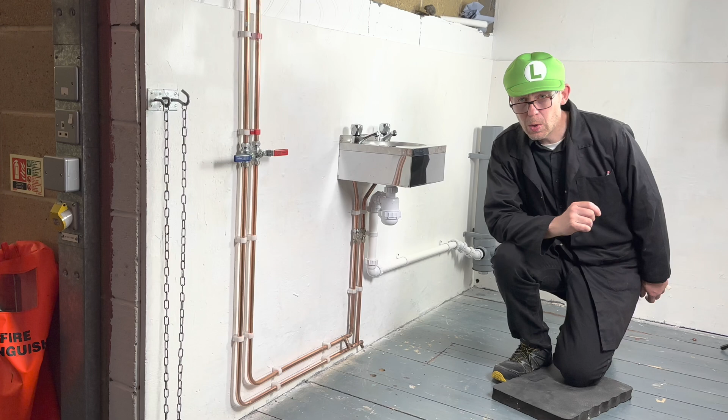Today we are going to install a wash hand basin using copper pipe and waste pipe. We will be following a diagram. Let's do it.

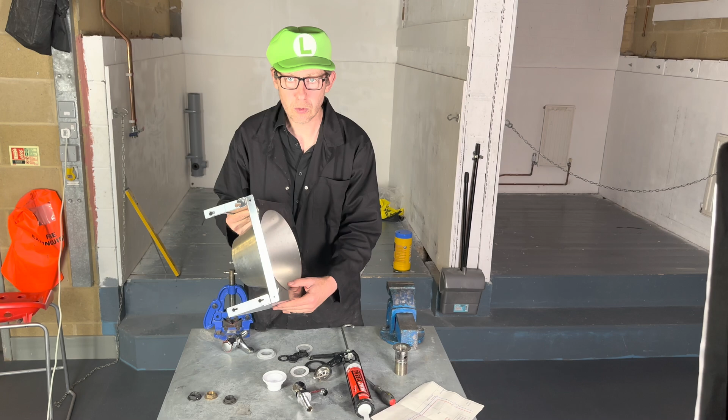The first job we do is we dress the basin. This means putting the taps on and putting on the chrome waste. It is easier to do this before the basin is installed on the wall. In England, the hot goes on the left, the cold goes on the right. Using silicone sealant.

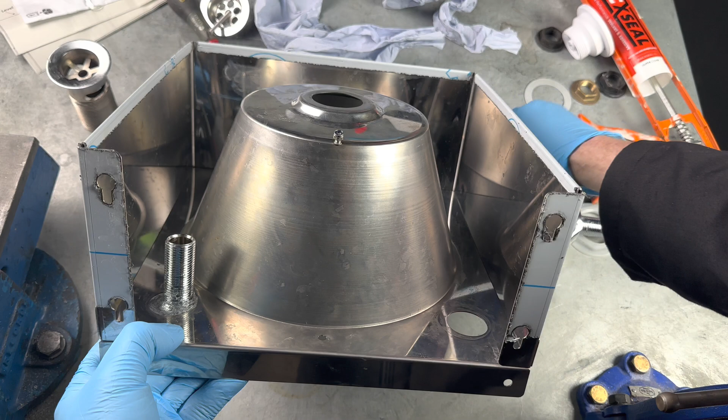And then underneath the basin, we'll put the washer on and the back nut. Okay, at this stage, just do it hand tight. And we then do the same with the cold tap.

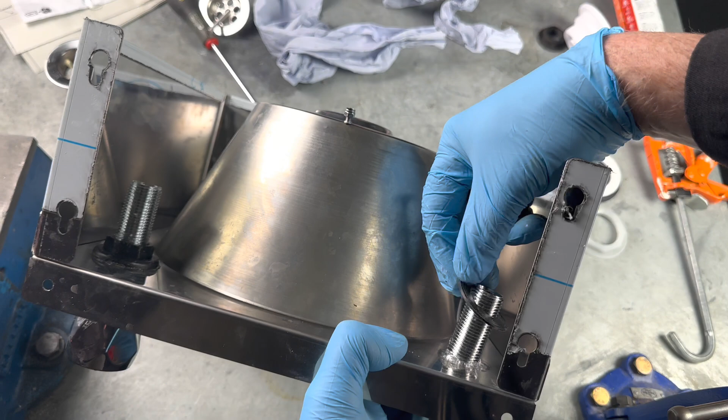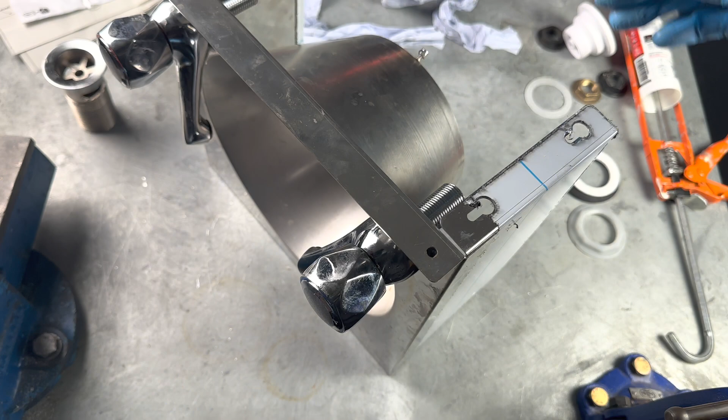So what we're going to do now, we're going to use a basin wrench. And what we're going to do, we're now going to tighten up the taps. So that goes there. Hold the tap from underneath to stop it turning.

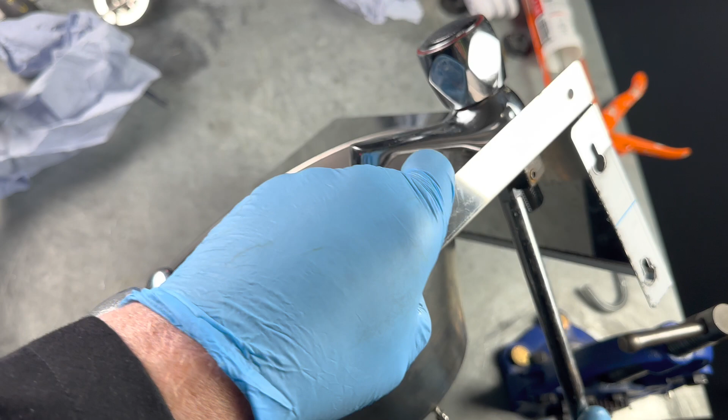And we then do the same with the cold taps. And we turn it. And we turn it. You need to hold it, because otherwise, if you didn't, that happens.

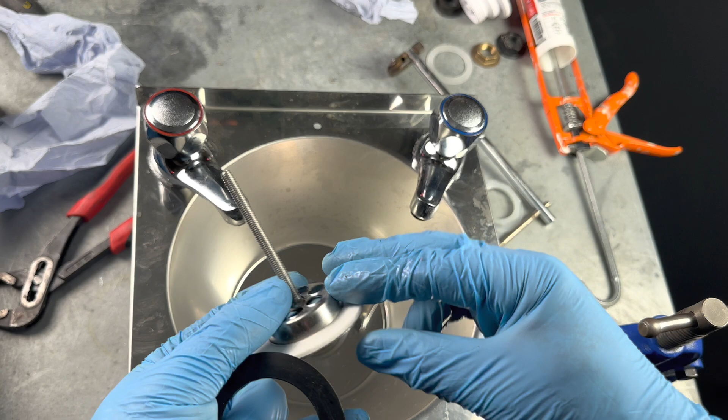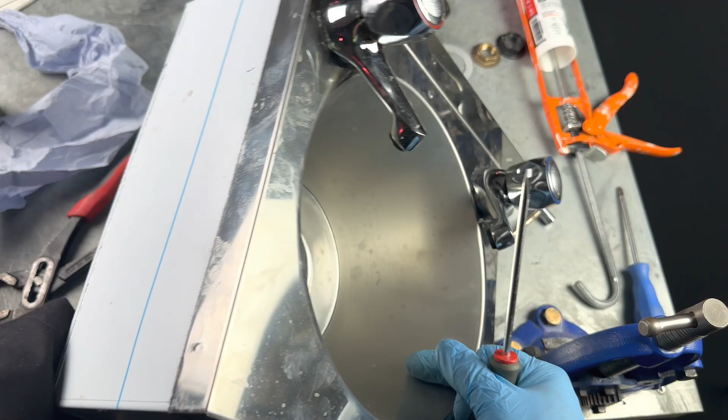So what we do is that goes through the hole, then we've got the black washer goes in there, and this time we just need a screwdriver to do it up tight. Right, the next job now is we need to remove any excess sealant.

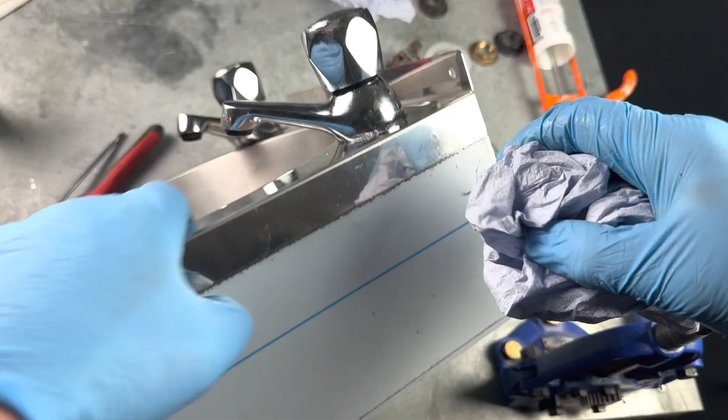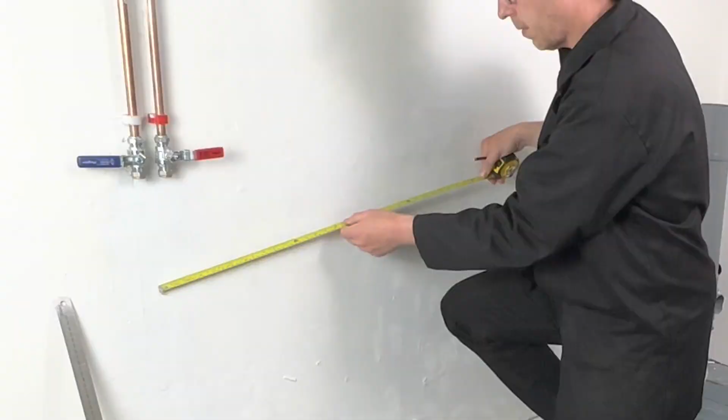Right, so what we need to do now is we need to mark out where the basin is going to go. So it needs to be 700 mm from the centre of the cold pipe to the centre of the basin. So that'll be our first measurement. Let's do it. Eyeball where the centre of the pipe is, and then using a spirit level, draw a level line downwards so we can then measure. We measure across 700 mm.

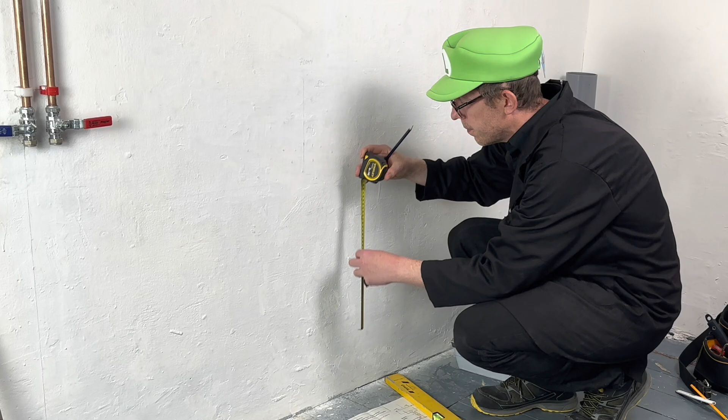Okay. Right, the next thing we need to do is mark out the height of the basin. So our diagram says it needs to be between 800 and 850 millimetres. Let's go for 850 millimetres. So let's draw a line 850 millimetres upwards. You draw a nice level line across. Okay, so it means the spillover level of the basin is going to sit here.

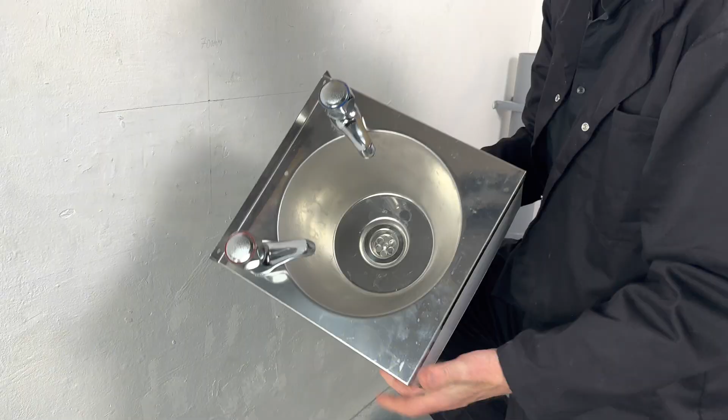We now need to find the centre of the basin. We can draw a line there. That's the middle of our basin there. We're going to line the centre of the basin mark to this line here. We're going to make sure that this ledge is touching this line here, which it is. Once we're happy that that's in line, the centre, we then mark the 2 holes on the top of the basin.

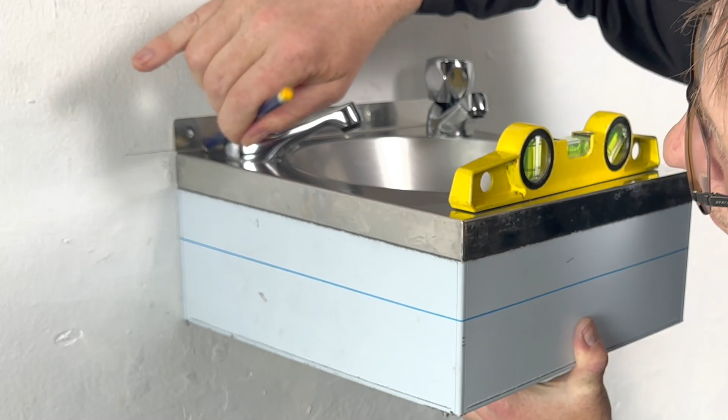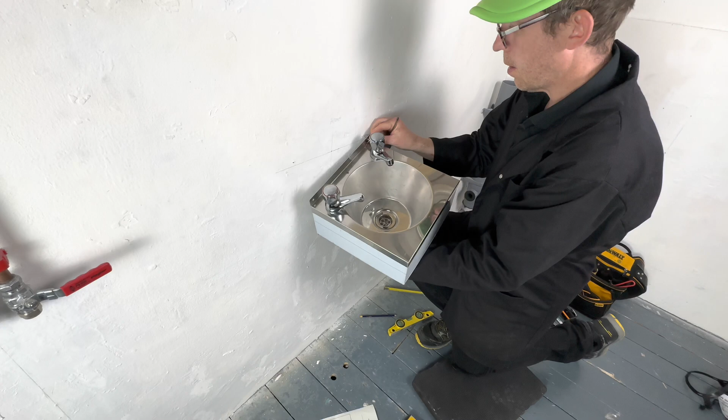What we're going to do, using the bradawl, what we can do now, using some screws and a penny washer. Double check with a level.

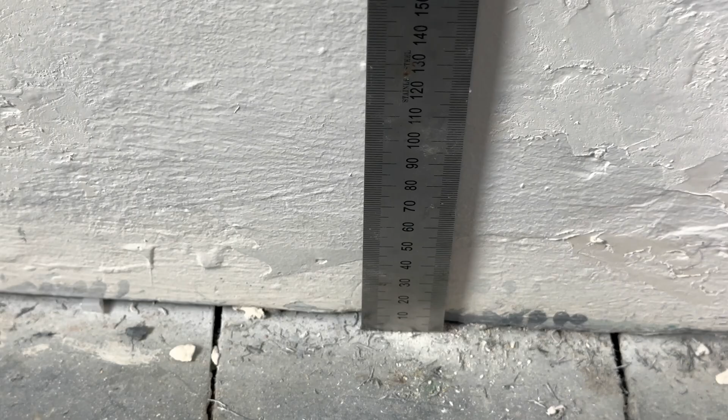The next thing to do is to install the clips for the copper pipework. It's important to get the clips right if you want your copper pipework to look good. Okay, so we're going to measure up 50mm from the floor, which is there, to 50mm, and then I'm going to measure up 50mm again, which is 100mm, and do a mark here.

And you then draw a line all the way across the bottom, and you then, on the second line, get the level, make sure it's level, a nice level line across. Okay, so we've drawn a level line, 50mm line there and a 100mm line there. But we've done this line already from before.

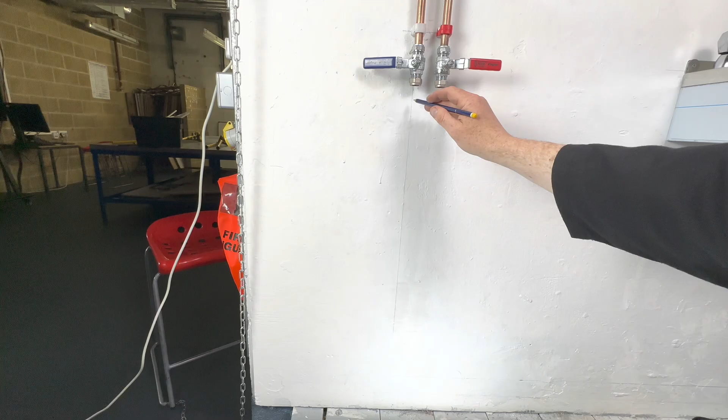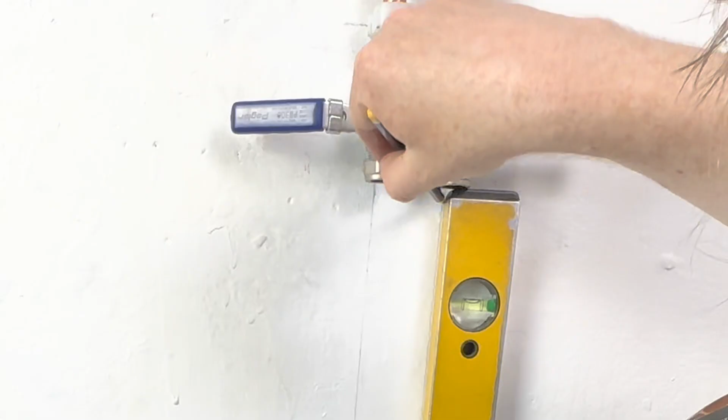We find the centre of the hot pipe, we do a little dash there. Like so. We've done a 50mm line to the bottom, a 50mm line to the bottom, measured up 50mm, and then 50mm again. And as you can sort of see the pipes where the clips are going to go.

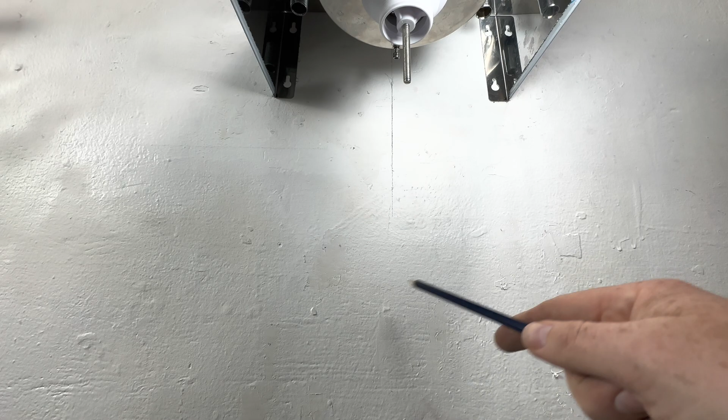Right, do you remember the centre of the basin mark we drew earlier, which is there? Because we know that the clips have got to be 50mm apart, what we're going to do is we're going to measure across 25mm and 25mm from the centre mark. So we're going to measure 25mm and 25mm that way and do 2 lines.

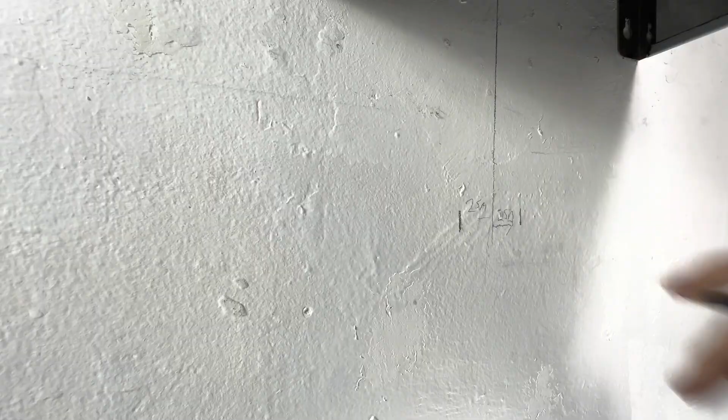Right, so let's just recap on what we've done so far. So we've marked it out. From the centre of the pipes, we've done 2 level lines downwards using the spirit level. And then from the finished floor level, we've measured up 50mm and done a level line across. And we've measured up 100mm and done a level line across.

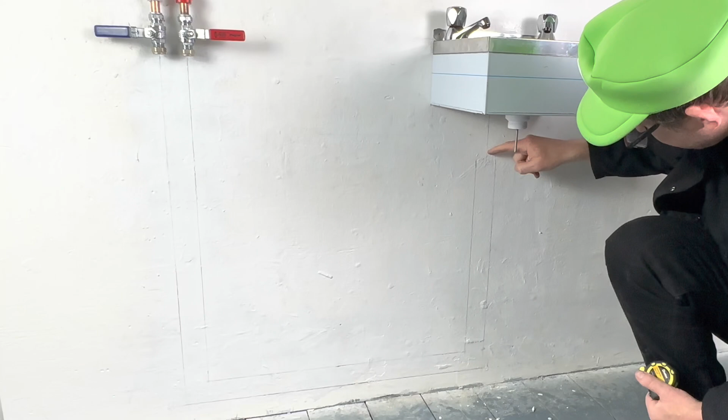And then from the centre of the basin mark, we've measured 25mm and done a level line downwards, and we've measured 25mm along and done a level line downwards. Next job is let's work out where the clips are going to go. I think the more clips, the neater your pipework looks. So in this case, let me show you how I would work out the clips for this.

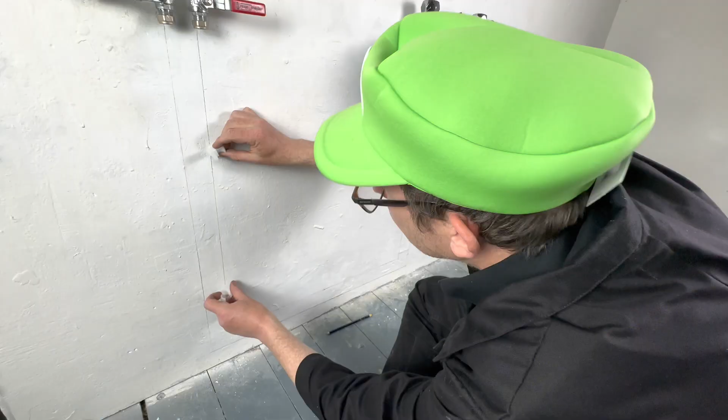I'm thinking about there and there. So using a spirit level, do a line there, a line there, so we have a clip there and a clip there. Okay, so we'll do a little circle, just to remind us we know there's a clip to go there and there. And then like what we said before, if we've got a clip about there, I'd say somewhere about here probably looks about right.

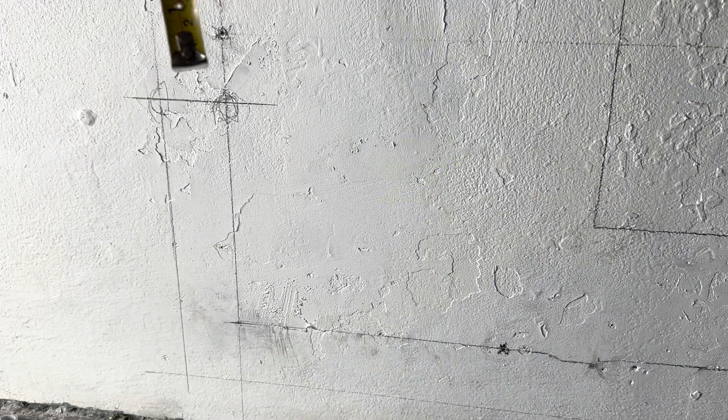So what we'll do is we will draw a level line across, clip here and clip here. We can measure from there to there, which is 170mm, and we can then measure 170mm here. We've got one there, we've got one there. Okay, and then what we do is we look at this gap here, we measure it. So in this case, it is 300mm.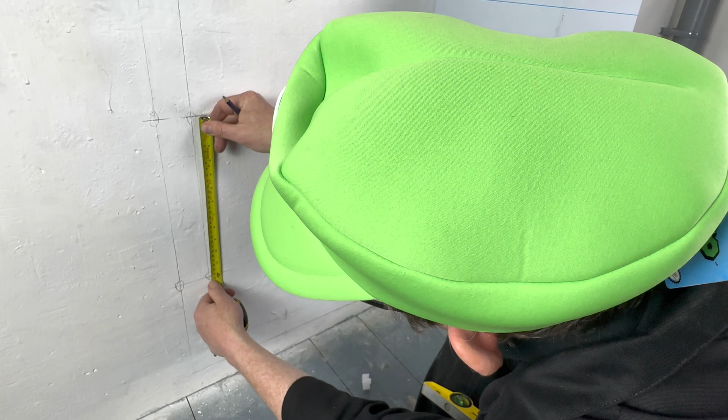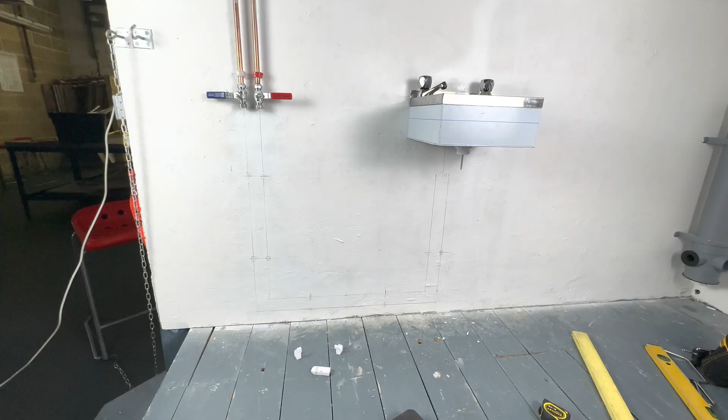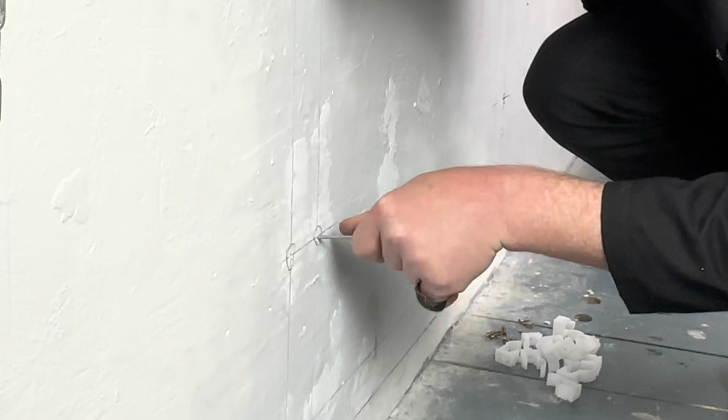So let's measure 300mm from here to here. A nice line like that. So there's going to be a clip going there, clip there. See this line here? We then transfer that across from there to there. Okay, so put a clip here and a clip here. Now using a bradawl, we're going to start to put the clips in. We're using hinged clips today.

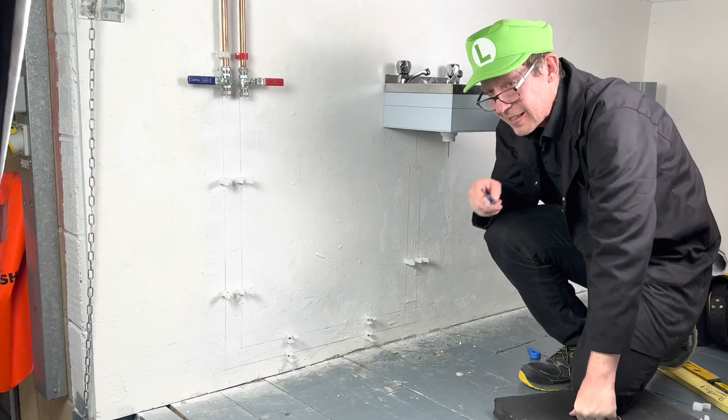Right, so we've now installed all the pipe clips. We're now ready to install the copper pipework. What we're going to do first is we're going to pull two 90-degree bends all the way round. It's good practice to be aware of how deep the pipe goes into the fitting. And in this case, that's the line, and the pipe only goes that far. So again, that's the line there. Pipework goes all the way to there.

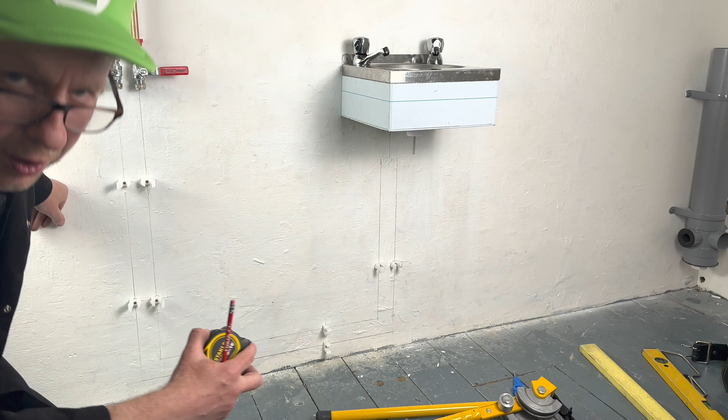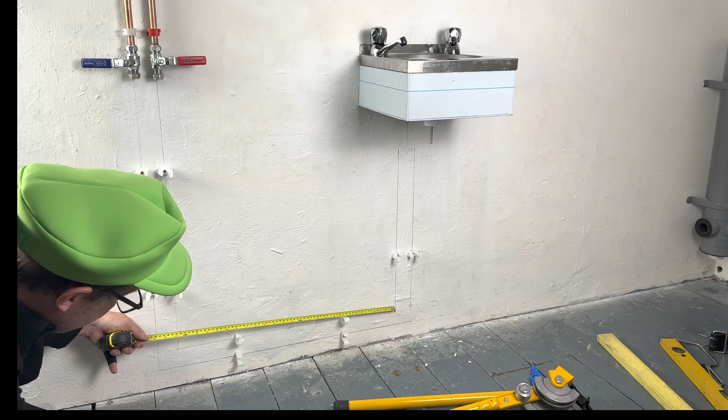Right, so we're going to measure this pipe from here all the way to the end. That is going to be 630mm, and then we've established from the centre line to the pipe insertion depth. So to that line there is going to be 710mm. Right, so we need to cut a piece of pipe 1,340mm to do this one, so let's do it.

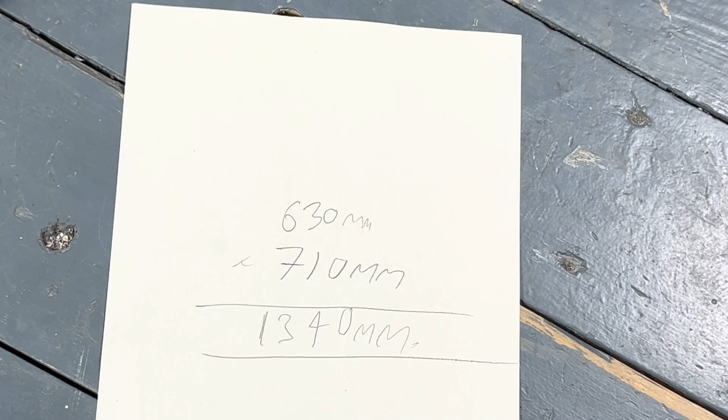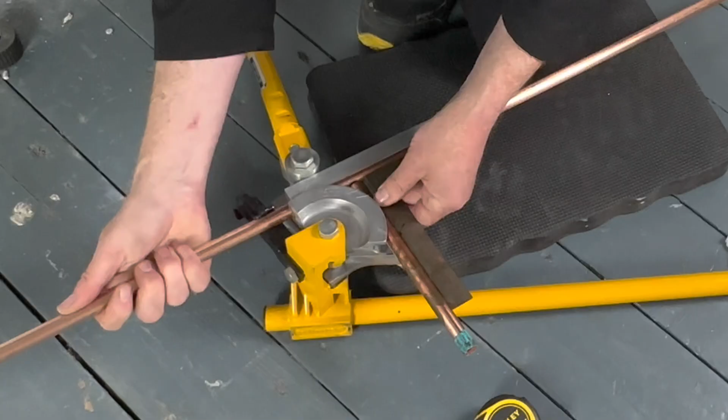We then need to measure 710 millimetres. So 710 mark from there to there. That's the fixed side. We want this to be fixed, so we put this in this side of the pipe bender. We then put the guide in. That's my 710 mark, and the 710 line is there. So when we bend it, the centre of the pipe's going to go there. So just like in my previous tutorial videos, that's what the pipe's going to look like when it's bent square 90 degrees.

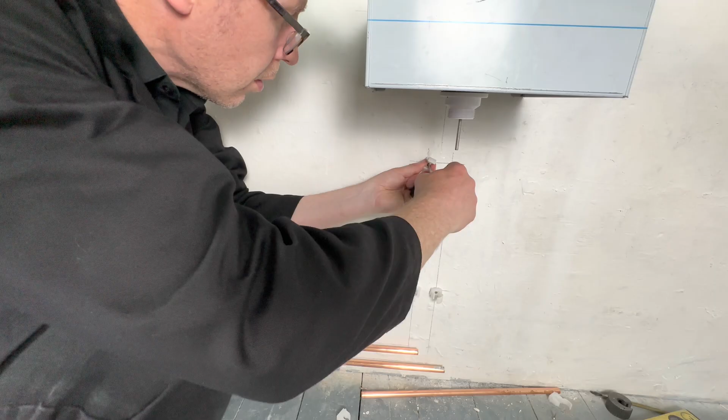I've now decided I think we need an extra clip here. Right, so from the middle of that clip, we're going to draw a line across. Alright, what we now do, get some pipe, push it into the clip, we then mark it using a pencil, where we're using a pipe slice. Put some flux around the pipe using a flux brush.

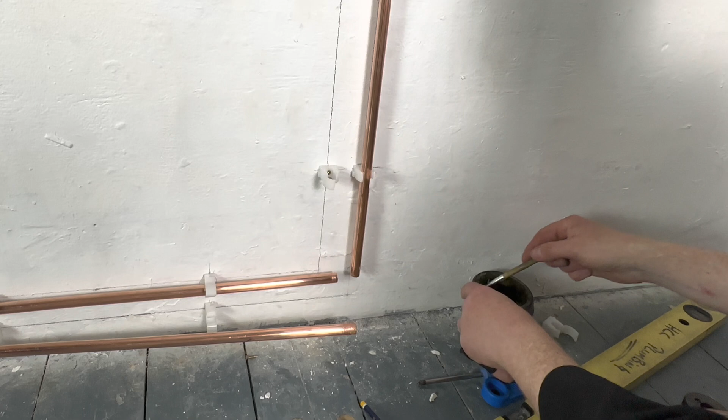Put some flux around the drain valve. You don't want to overheat the washer, so we remove that temporarily. Right, I really have the drain valve here. It's not going to work. So what we're going to need to do is try and have it somewhere like this. Okay, that's what we'll do.

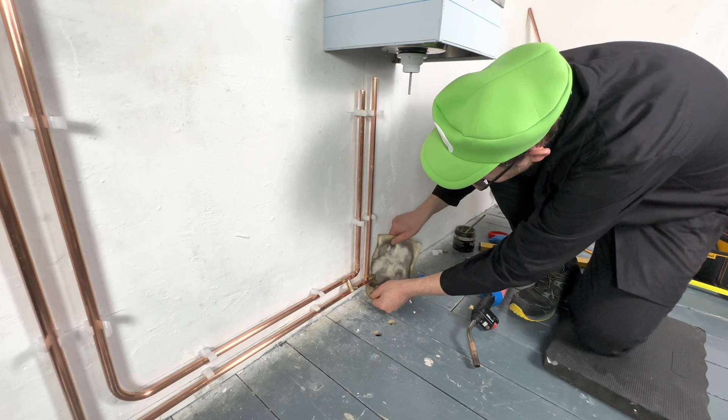Heat-proof mat. Okay, so what we're going to do, solder up.

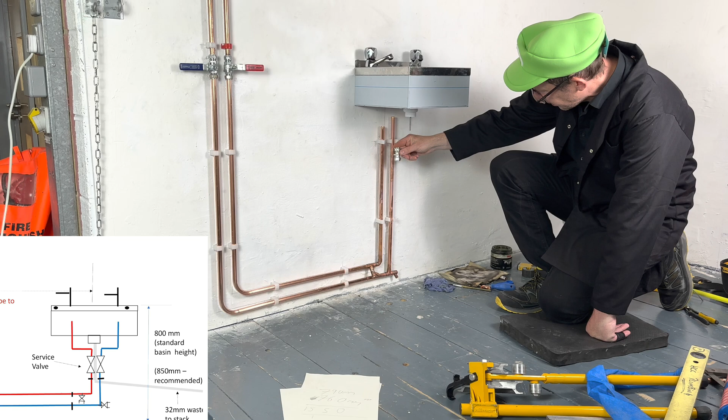At this stage, we push the lids on the clips when you're finished with all this. We won't close these just yet because we're working on this bit. We put some isolation valves in, and then connect some pipework up to the taps. So let's do that next. So we can get some clearance on the bends, I'm just going to cut this pipe a little bit. I'm going to cut the isolation valves in about here.

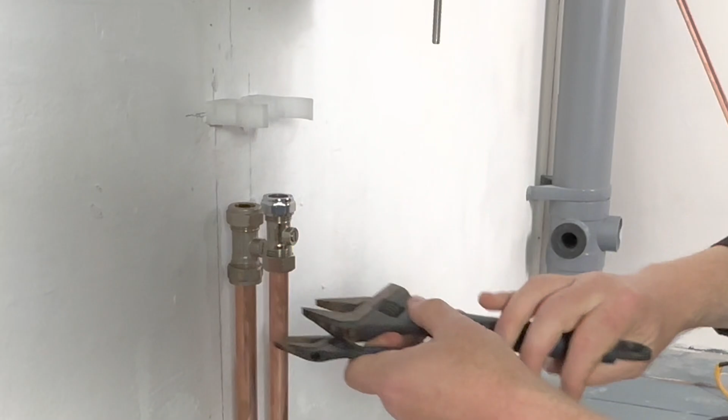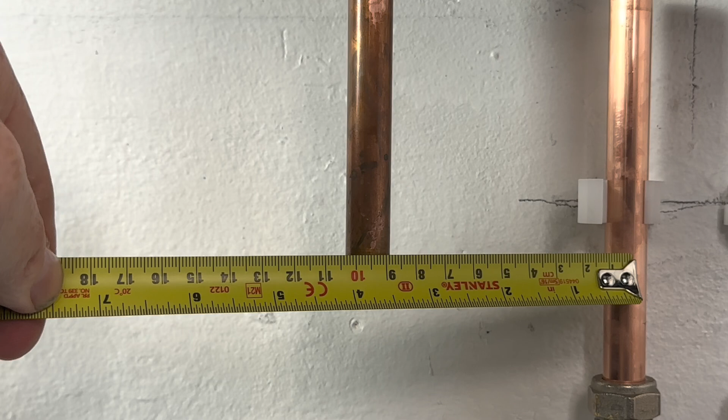Get a piece of pipe with a tap connector. I'll then put another piece of pipe in there, and I'll then measure centre to centre. Okay, so we need to bend 2 offsets, 90mm. So let's do that now.

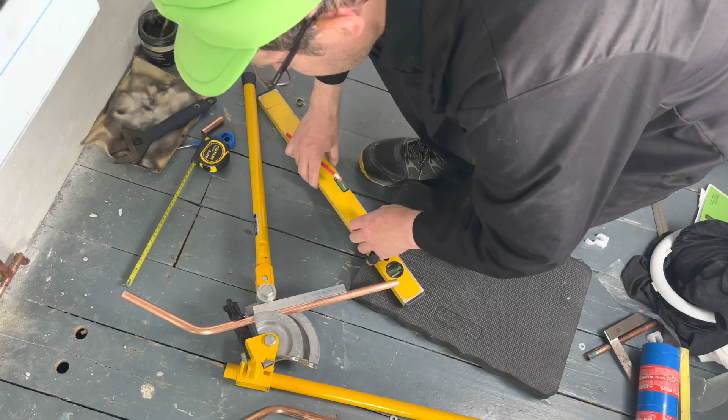Just look at my other videos. We measure parallel on the edge, and that's reading 90mm there.

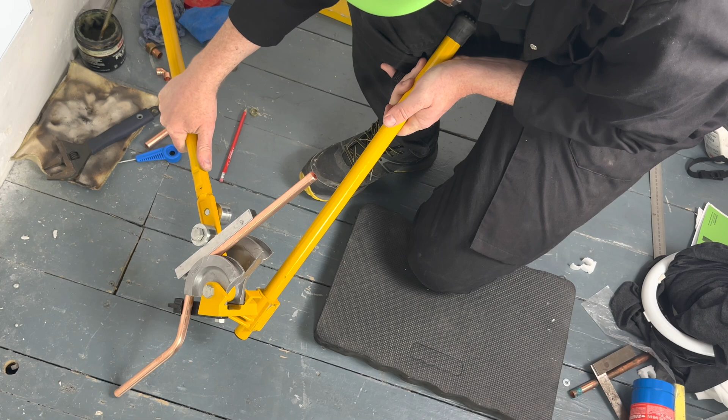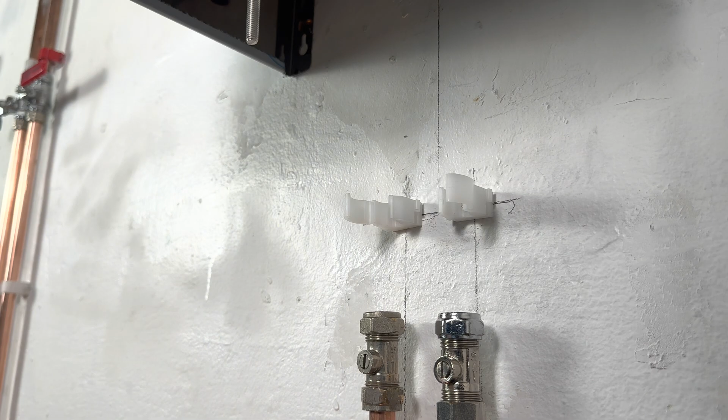So, alright, so it's a little bit. That's what we've got so far. That's how it's looking so far. But it's not quite. I'm not happy with the interference with the clip. So what I'm going to do, I'm just going to cut this a little bit shorter, so it sits a little bit above. So I'm going to cut a bit more off that. I'll put it in place one more time. Yeah, I'm happy with that.

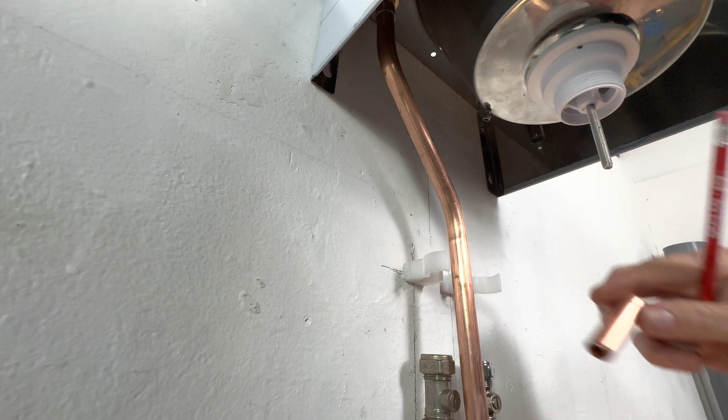Right, so what we then do is make sure you put the washers on, fibre washer. Just do it up hand tight at this stage. All right, we then need to work out how far this goes into the fitting. Right, so this one goes in to that line there.

Right, what we then need to do, we unscrew this fully. We pop this into here first. We pop this into the compression here. Do that one up.

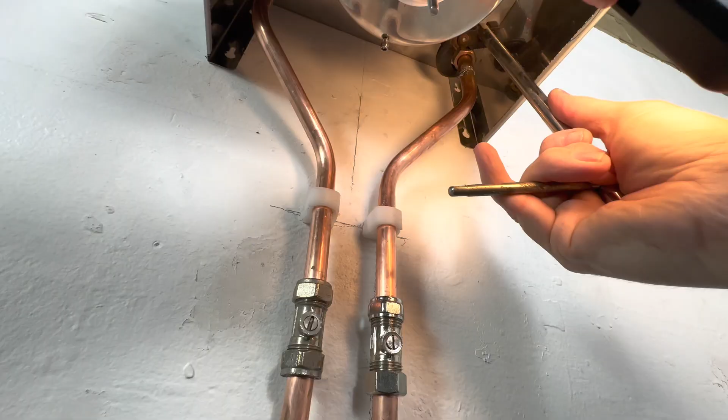And put the basin underneath, and we then turn it. Turn. I know I waffle on, but it's all about getting the clips in level and right. If you get the clips in level and right, then your pipework will follow and look nice. So always focus on getting the clips right.

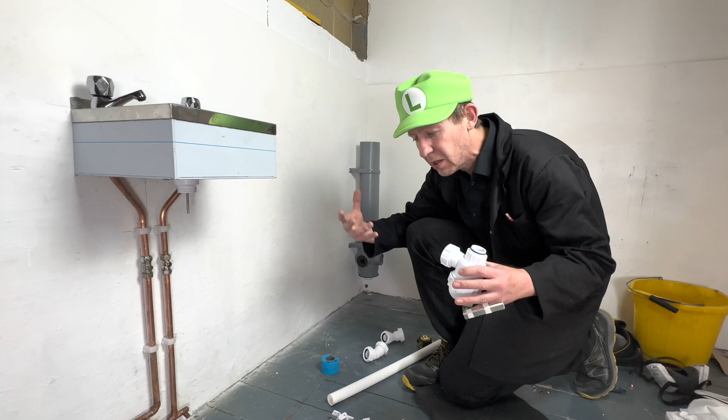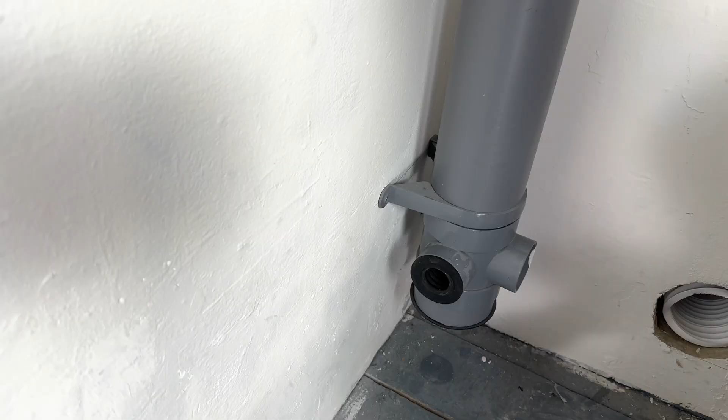We are now going to do the waste for the basin using 32mm pipe. We are going to connect it to the 32mm boss in this stack pipe. We are going to be using a bottle trap. So our pipe, this is our boss, we need to bring it closer to the wall. Right, that's our first job.

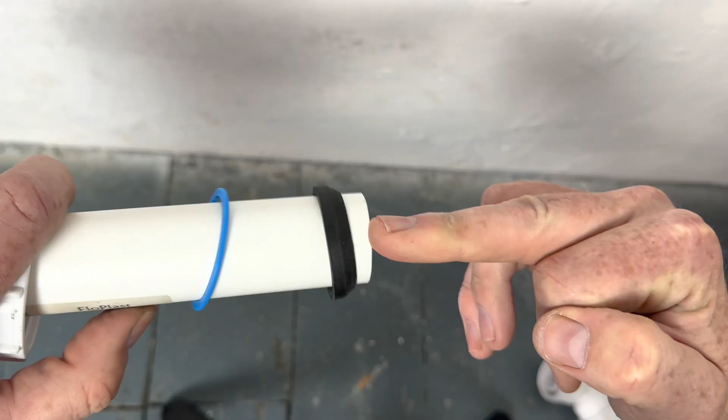And that, and that, in that order. That then pushes on, and we just do it up hand tight at this stage. Wedging in, so you don't want to be doing it this way. You want it to be wedging in.

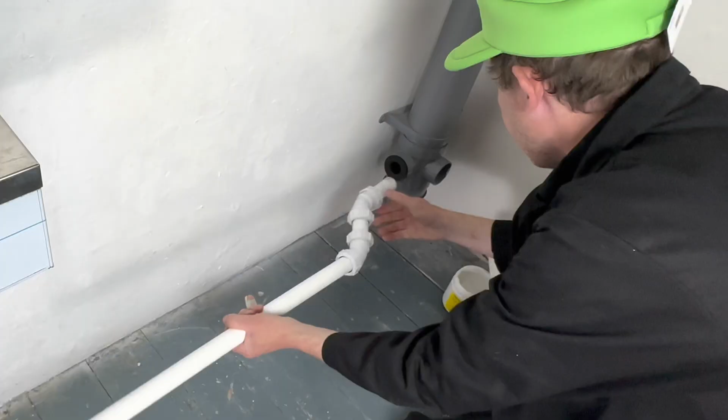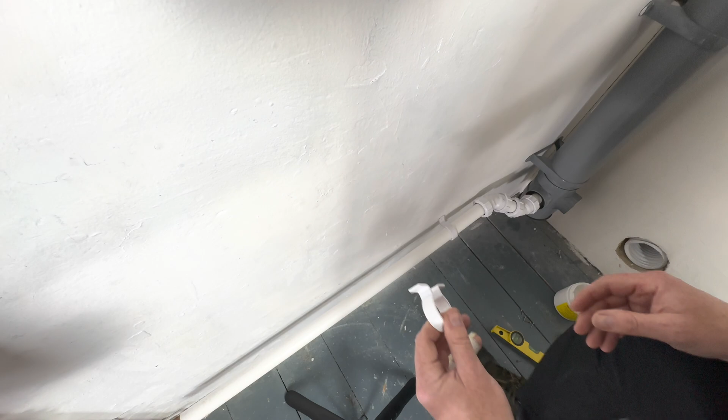We then put some clips just in place, just some 32mm clips. So we're going to put a spirit level on the pipe. That's level. We want it just a little bit upwards. What we'll then do is, using our pencil, we'll mark it.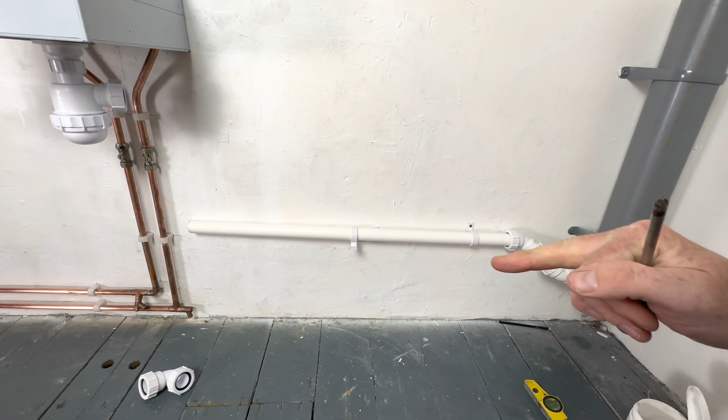So that's how it's looking so far. Can you see it's just got a slight slant on it? Okay. So far that's where we're at.

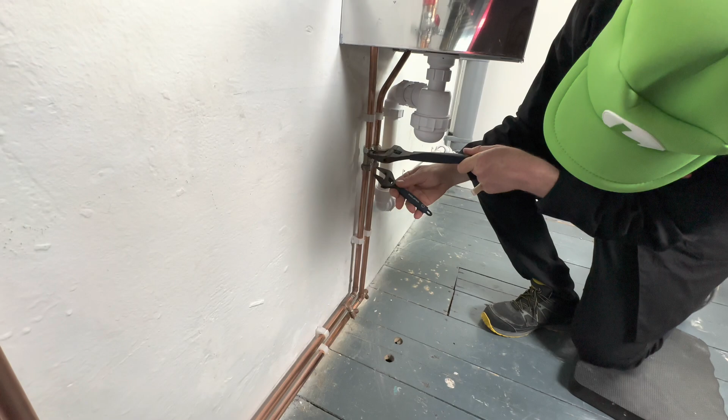Right, the first job is to have a visual inspection. So make sure that all the clips are secure, the pipework's secure, make sure that all the joints have been soldered. And then when you're happy with that, it's then best to check that all the joints are tight. Just double checking everything. Make sure the bottom of the drain valves are done up tight. Make sure that all the joints are nice and tight.

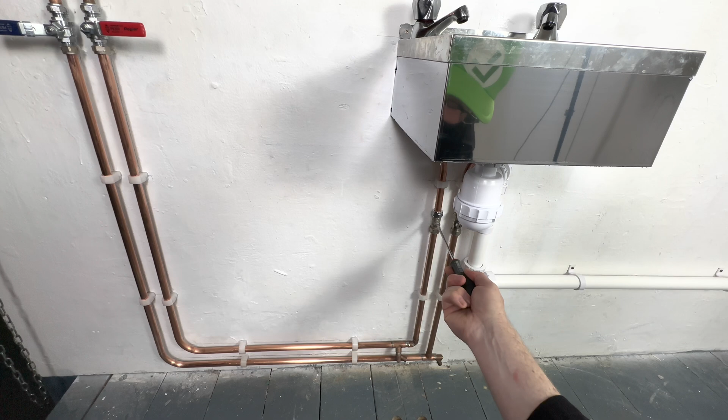So what I then do next, I turn off the isolation valves so they're in the off position. That's currently when it's on, so make sure they're turned off. Right, so we're going to test our pipework in sections. We're going to turn on the hot, and the water's going to go as far as there. We're going to turn on the cold, and the water's going to go as far as there. And then when we're happy, we're going to switch the water on here to test to there, and from here to test to there. Switch on the water.

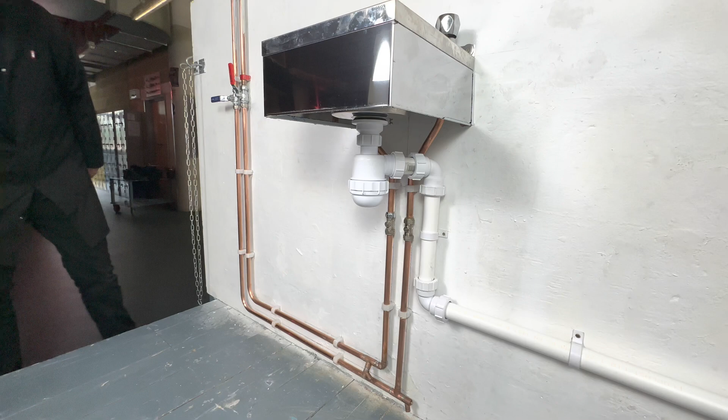Alright, we have a visual look. Right, so we now switch on the cold. We have a visual look, we check all the joints. Make sure the taps are turned off. And we then turn on the water to there. We have a visual look for leaks. So the water is now on all the way up to the taps.

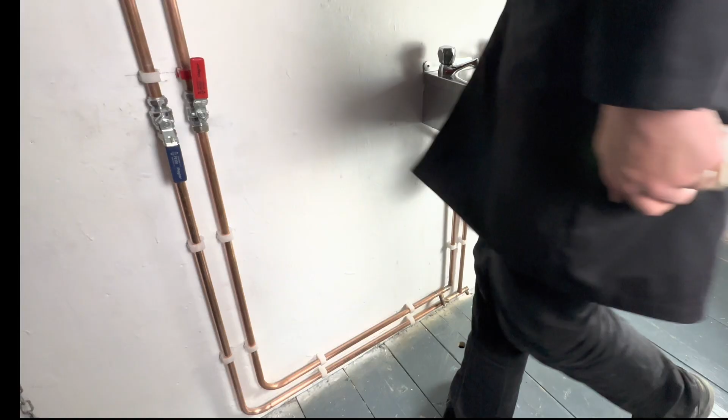What we're going to do now, we're going to test our waste pipework. Right, so we'll fill the basin up all the way to the top with the plug in. Right, so then pull the plug out. And we then check for leaks, which in this case is all good.

Now you know how to install the basin with copper pipework and waste pipe, it's your turn to have a go.